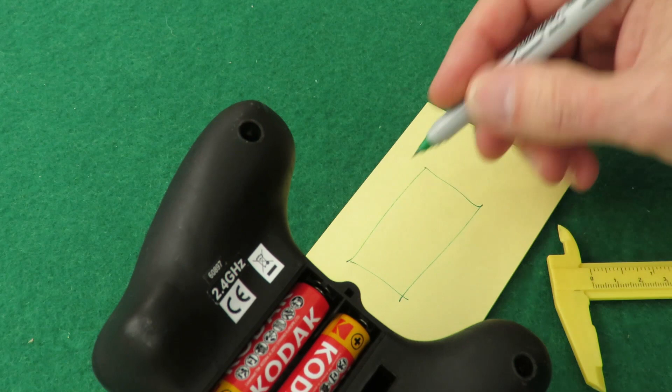That's 56 to there. Check that again. Yeah, 56. A little bit sticks in at the end there.

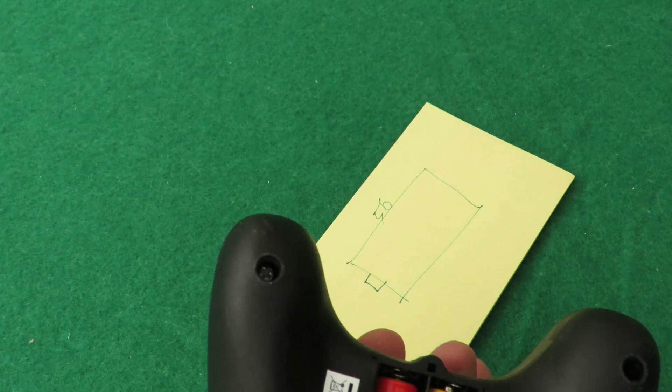Can we actually get in there with that? Yes, we can. That goes in about 5. That's just under 10, we'll call it 9.

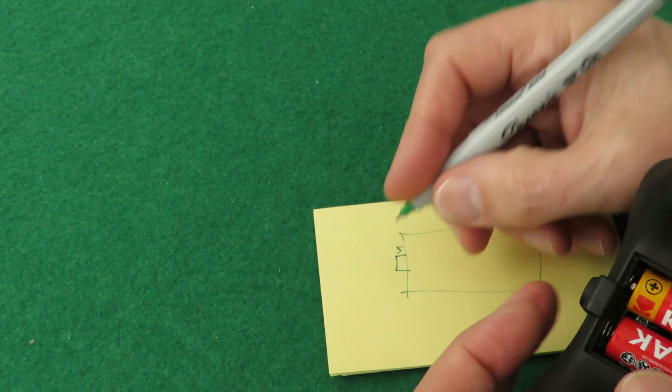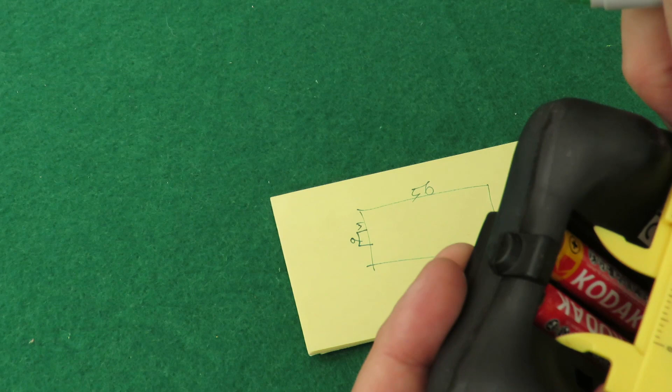And then we can just measure this across here, which is between 33 and 32. We'll call it 32,

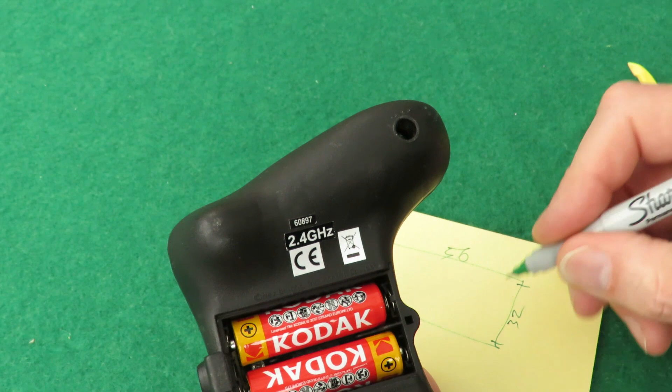but then we need 2 little bits that go in, and I reckon they're going to be about another millimetre on each side, like that.

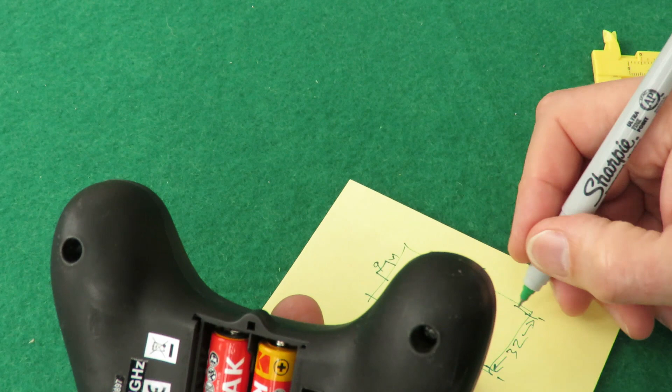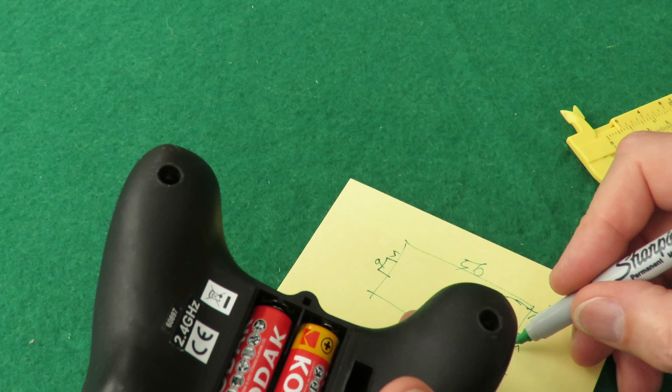So 1 millimetre square on the edge, and if we make it 2 millimetres thick overall, and then we want a little bit that sticks out to go over where I've been drawing, a little bit that's going to stick out over there, which may or may not have had a screw in it.

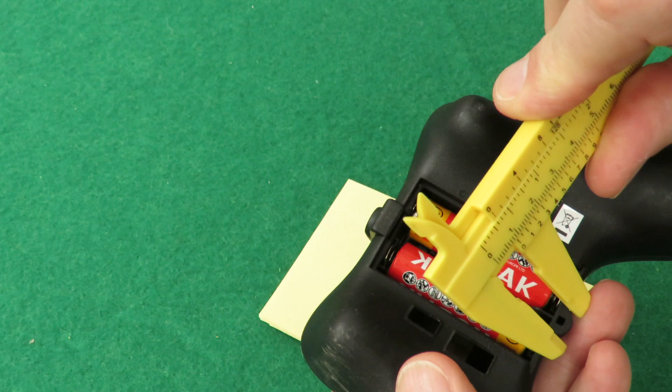Maybe just a little bump on the bottom of it. Very roughly about 3, maybe 4 radius, roughly. Something like that.

So we'll just see if we can print up a little oblong bit of plastic.

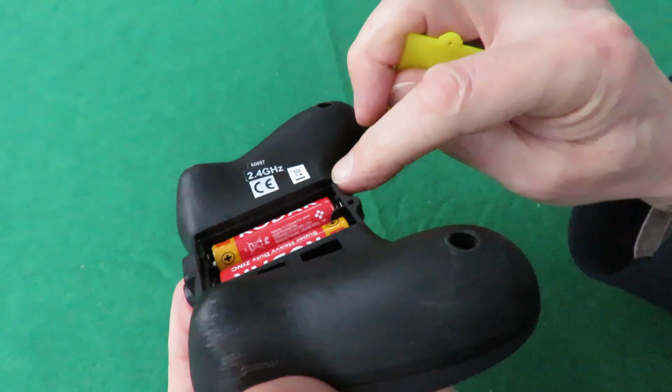I almost got it right, but I did make a mistake in my measurements. Those slots up either side, where that slides in, I thought they went all the way along, but they don't. They're just in the very end there, only about 5mm. It's just to stop the end popping out, but the rest of it should just slide all the way in.

So I can either reprint it, or I can just trim it up the edge there, and that'll hold it in place. I've done one side.

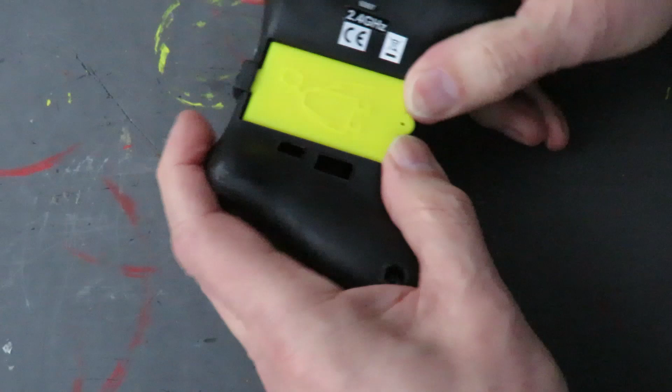Yeah, so that will work. Looks like I could reduce the length of that a little bit as well. Let's do that the quick way.

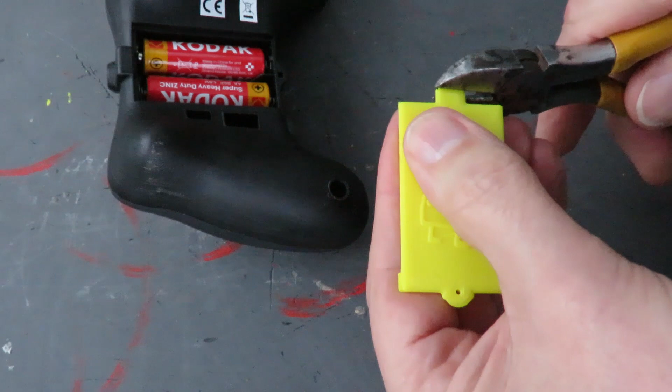So that's about maybe 2mm, I just trimmed off the end. So there we go, that'll stop the battery falling out, but it's not perfect. So good enough for now. But we could have done better.

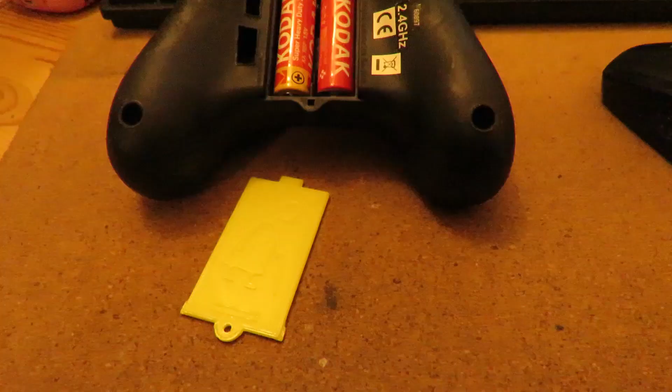That's version 2. So I've actually printed it with just those little bits on the end there, tidied that up, shortened that a little bit. So now that fits in there perfectly. In fact, I could even put a screw in there.

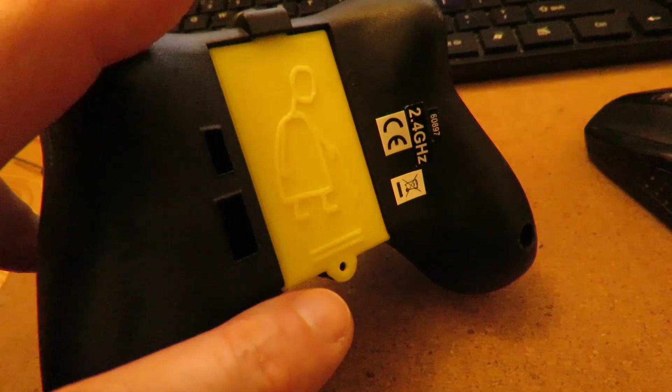Yeah, quite pleased with that.